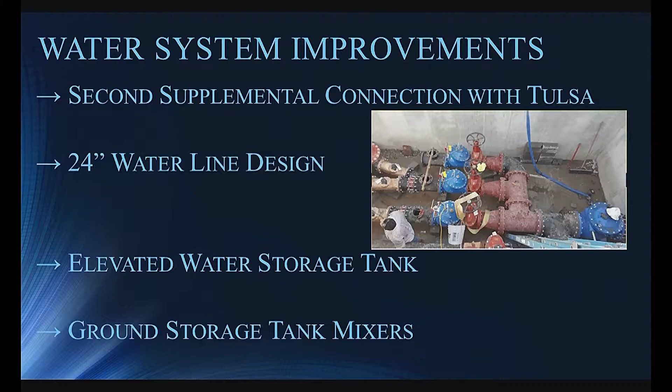Ground storage tank mixers. As we've learned by switching over to chloramines about 3.5 years ago or so, chloramines are a fantastic disinfectant, but you have to give a lot of attention to them, really at your storage tanks. You actually just had approval on this agenda to go ahead and start construction on some mixers in all 5 ground storage tanks. So that'd be 5 million gallons at Battle Creek and the 4 million gallons up on Tiger Hill. So it's actually 4 tanks that we're adding the mixers to.

The ground storage tank, the west one on Tiger Hill, 1 million gallon, we're actually rehabbing. There'll be some painting and some improvements to the structural integrity of that. So that's actually moving forward as well.

Now some of the bigger ones, the pre-treatment or plate settlers, you just approved that previously in the consent to actually make some modifications. This is kind of our bottleneck at the plant that's creating a little bit of challenges for us. As we address these challenges, we can actually increase our production at the plant to 30 million gallons per day. So this is something that we'll go design most of the year and hopefully later this year or sometime next year move into construction on this one.

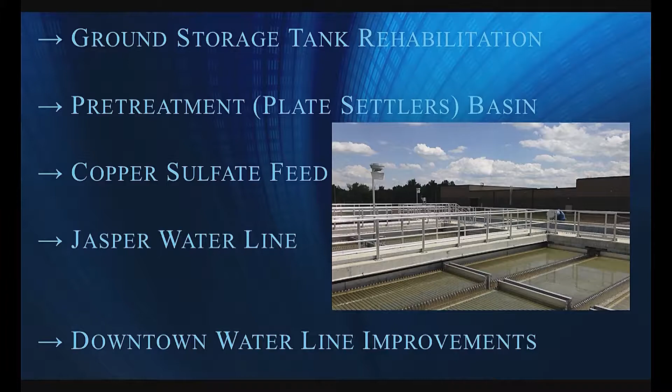Copper sulfate feed, that is an algicide. So it kills algae at the plant. This is a booster pump that will actually feed the chemical to kill the algae before it gets into the plate settlers, and that way it won't foul our membranes. That design's already underway and will move into construction later this year. Jasper Water Line, 131st Street from just basically Olive, about a half mile east.

It's an 8-inch line right now. We want to upsize to a 12-inch line. The design is underway. Construction monies are actually about a year or two out, but we think we can do this with our in-house crews, so that's why we've moved the design up to try to save some money and get it moving quicker.

Downtown water line improvements, this is an ongoing process. We've got some money in our loan right now. We want to upsize College from Main Street to Cedar from a 4-inch to an 8-inch to help the circulation and distribution in the system. Design is under progress right now. We'll be in construction later this summer, by no later than the fall.

A few other items for water is the Kenwood Hills booster pump replacement. That actually would have been in construction, but the guy standing before you had a bright idea as he's driving down the expressway, and said, why are we trying to rehab a 40-year-old booster pump station when we can now bore underneath the highway and tie it to our high-pressure plane, which would be the tank at First Baptist Church. So my staff and I talked it through, looked at it, got with the consultant, and we decided it actually is a better improvement. It takes away maintenance and operations of a booster pump station, puts them on the high pressure plane, which boosts their fire protection, and we just felt like it's a better solution to save money.

In-house staff is actually completing that design. We're about 60% complete. We should be done later this summer, early this fall, and go to construction hopefully by winter. Last two items, long-term water supply plan.

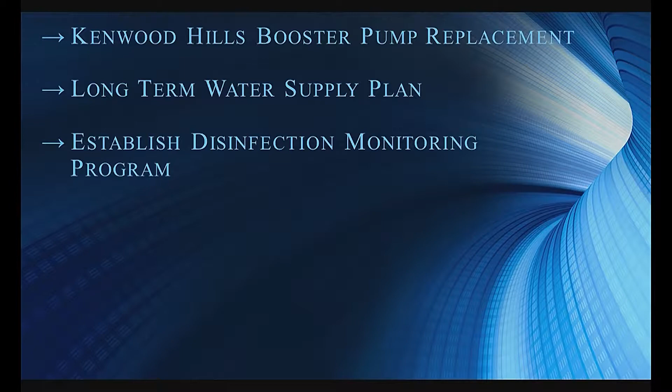For those that were here previously, we had a special council meeting, I believe it was in February, to talk about the 2060 water plan. What are we going to do moving forward? So we're looking at a long-term horizon. At that meeting, we had great discussion, great input from everybody, giving everybody opportunity to go through it a little bit more. I'm going to set some time aside and meet with Ms. Wimpy and go through that with her and get her up to speed. And hopefully this fall come back and get that document so we can move forward with it.

And then lastly, as I said earlier about chloramines, it's a great disinfectant, but it needs a lot of attention. As we've learned over the last few years of dealing with it, we need to create a monitoring program, like we said, at the tanks and some of the other locations, a little more than if you use chlorine. So we actually got that started earlier this past spring. We've got some testing, and now we're developing more of a full-fledged program with that.

Wastewater system improvements. This is the one that needs the most attention, as everybody knows. Right now, the preliminary treatment, that's the headworks and the grit removal, it's at DEQ for review right now. It's about $13 million construction. We anticipate advertising this June and being in construction on this in September.

Kind of tied to that, the next one down is the digester rehab. That's actually on the street right now advertising. I believe it's an early June opening, so we anticipate being in construction by August on that. Both of these together are running a little over $15 million to the Lynn Lane wastewater treatment plant. It'll help obviously on the operations and how we go through the treatment process as a whole, but the other thing is they both will help on odor control as well.

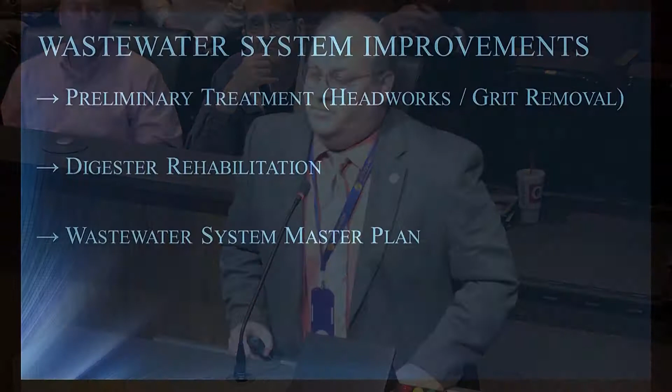The wastewater system master plan, we're actually just finalizing that right now. The document's in, and the only thing we have to really do is the final review and make sure that all the capital improvements that we have identified over the last couple of years are in the plan. The key here is kind of like the water: what are we going to do with our wastewater system over the next several years? So that document is almost complete.

Bar screens are approved. We're ready to advertise that here shortly. This is for all of our lift stations, putting screens in front of them to take care of a lot of the debris that comes in and clogs up our pumps and creates a problem. A lot of our stations don't have that, so we're already putting bar screens in those stations.

East Haskell subdivision sewer upgrade. This is a large subdivision that needs a lot of upgrade in their sewer system. Money, again, is about 2019, but we're trying to get the design done, and this may be something that our crews can address as we go along to help reduce some of the cost.

Elm Creek trunk line, the upsize of that. This is just the main sewer line just west of Elm, down in the south part of town, that goes to the Lynn Lane wastewater treatment plant. This is largely about 18 inches in most places. It's overloaded. The system is overloaded with the waste being carried to the plant.

We've got something else that's helping that, but it's in design right now. We're taking a look at some modifications and hopefully in the next year or two get that into construction. We don't have the funds yet, but it's scheduled in the future.

Secondary clarifier rehab, the design is complete, and we will be going back to OWRB to get some funding, most likely this fall. This is one of the big packages that will go back, so this should be in construction early next year.

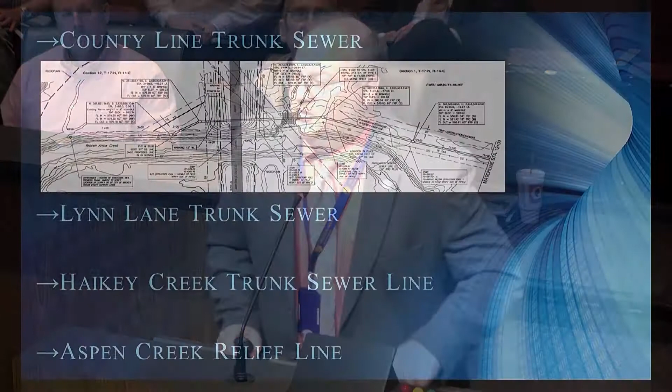Aspen Creek Relief Line, Mr. Spurgeon actually mentioned this in his comments. This is the line we're putting in just west of Aspen. It's about a mile from Tucson 121st to Florence 111th. It'll take 2 lift stations offline that will now go gravity feed.

One of the lift stations runs almost constantly, that's how much load it has. That lift station right now on Florence pumps to Elm Creek. So as Aspen Creek Relief Line comes online later this year, we'll relieve that huge load going to Elm Creek, balancing it out a little bit. Very good use of some funds we found to not only spur economic development, but address a lot of problems that we are having.

Oneta Road Lift Station, this is Oneta and Kenosha. It's complete. Substantial completion's already taken place. We're already using it right now, and we just have to finalize a few items with it.

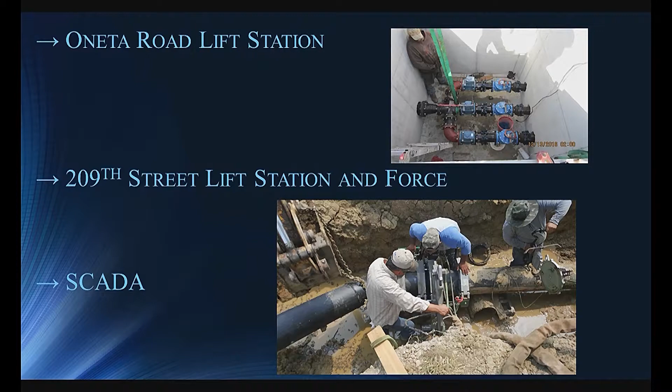209th Street Lift Station and Force Main, I believe I left the word main off. This is actually under construction right now. This will be basically just east of the Turnpike and south of Kenosha. It's about 9,000 feet of force main that will redirect a lot of undersized lift station flow right now, redirecting it toward the County Line trunk sewer and on to Lynn Lane. This has to be online by the time Timber Ridge opens up in August.

So the engineering staff, along with utilities, got very creative to figure out how to get this thing working. Right now, it's under construction and moving along real well.

SCADA is a control system that will allow us to look at all of our lift stations and booster pump stations. Right now, we can't, we have to go visit them daily. We have crews going out and looking at them. Now with this control system, we can monitor that and be much more efficient and effective. This is ready to go to construction right now.

Last couple of slides are on RMUA. This is a flow equalization basin. We just completed one at the Haikey Creek plant a couple of years ago that can hold 12 million gallons. In the last couple of rains, when we had the weekend back-to-back storms, the 12 million gallon basin actually overflowed. It bypassed, it was that full. We had 12 million gallons of diluted wastewater in it, but it's still a bypass.

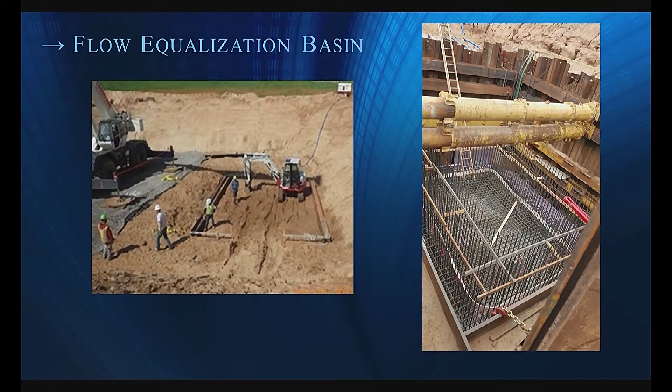We're under construction right now with an additional basin that will bring our total up to 30 million gallons of storage at the plant. This one's already in construction. It'll take the better part of this year to complete.

Last few items: Haikey Creek force main. Right now we have a 24-inch and I believe a 30-inch force main that go to Haikey Creek from the lift station in Haikey Creek Park. It pumps south about 3.5 miles to the plant. We're getting ready to upsize one of the force mains to a brand new 36-inch force main. That will start this summer.

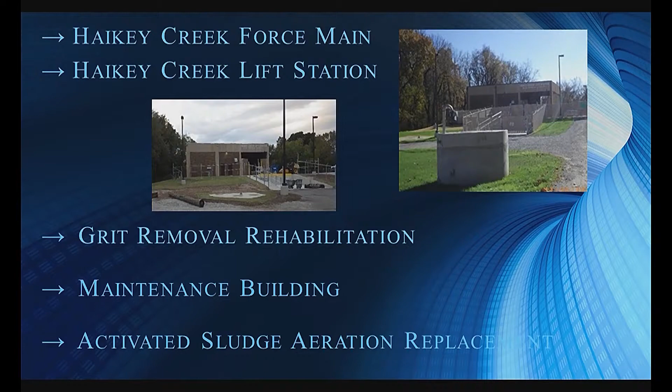We have our funds in place, design's complete, we have right of way. Tulsa will get their money here in the next month or two, and then we'll go to construction with this one, right down Garnett basically.

Haikey Creek Lift Station, I just talked about that - we've basically completed odor control and screening with that lift station, and now we'll go into future phases with that, including grit removal and rehabilitation.

The last three items are all at the plant, and they're just starting design - each one of them is just getting into contract and starting the design process. All told, we have about $70 million in design and construction that has really just started over a year ago, and will be in construction on most of that by the end of this year.

Right now, I applaud everybody that's been involved in addressing this - engineering, utilities, legal has helped us, finance. Tom Caldwell doesn't like to see us coming because he knows what's next - I need millions, but that's where we are. We've made a lot of progress, and it's just been a team effort.

So I'll be happy to answer any questions that you may have.

Any questions of Kenny? Yeah, I had somebody ask me actually this last weekend on the Lynn Lane sewer treatment plant, percentage-wise, how successful do you think that will be in reducing the odor?

I think it's going to be very successful. We've got a few problems out there, but the biggest part of that success is kind of twofold. We're moving the headworks, which is open to the atmosphere right now, south away from the property line and enclosing it. So that's huge right there.